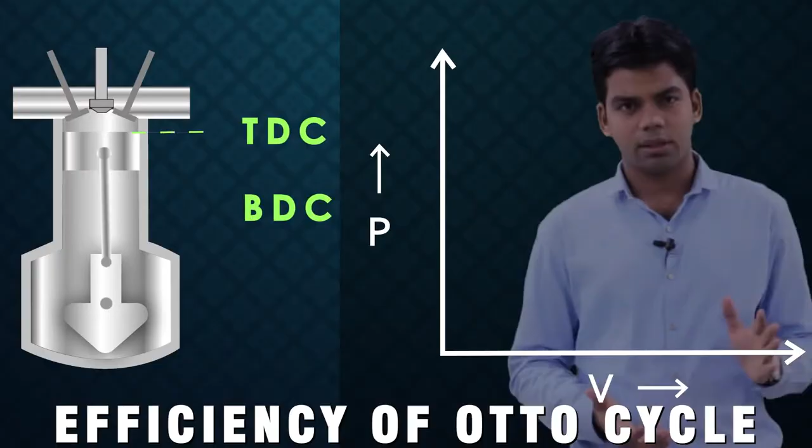Now we will draw the PV diagram for this Otto cycle according to the working of this SI engine. So, we are having the pressure in the y coordinate, volume in the x coordinate. Initially the piston is at TDC, as you can see here. Initially the piston is at TDC and the volume inside the cylinder is nothing but the clearance volume. Here I can show this point with 0. The volume here is the clearance volume.

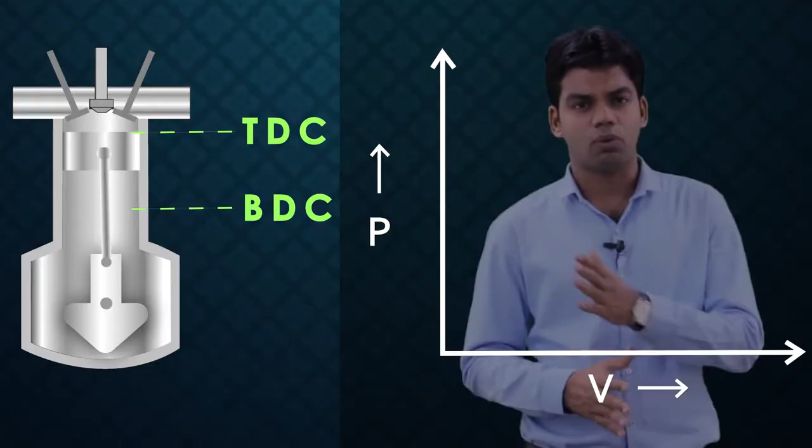Now, as the piston moves from TDC to BDC, you can see the volume inside the cylinder is increasing. The pressure is almost constant. Here, as I told you, we are discussing the ideal Otto cycle only. The pressure is almost constant, the piston is moving from TDC to BDC, volume is increasing. Okay, so, it will travel from 0 to 1. Now, after that, this was the suction stroke. Now, second stroke is the compression stroke.

The inlet valve is now closed and the piston will travel from BDC to TDC, and ideally this compression is assumed to be a reversible adiabatic compression process. Okay, so, we are having a reversible adiabatic compression now, and at the end of this compression the piston will travel from BDC to TDC. The process here is from 1 to 2.

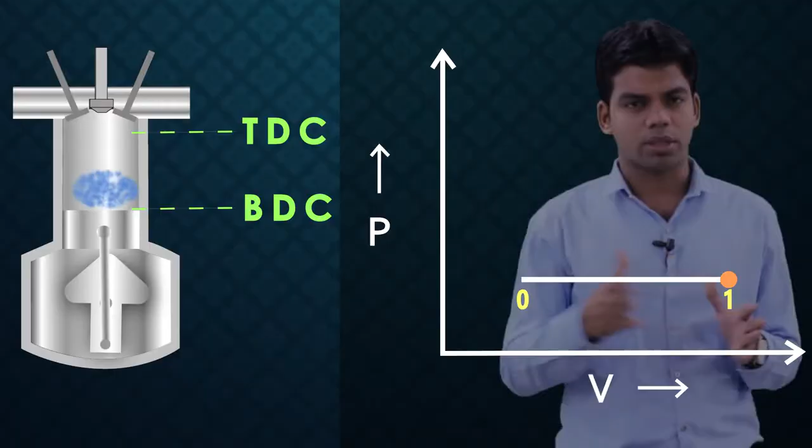Then after that the spark plug will produce a spark and the heat is added to that fuel air mixture, or that fuel air mixture will be combusted. And as I told you, that heat addition is at constant volume. We assume that heat addition in the ideal Otto cycle is at constant volume. So, we are having a constant volume heat addition process. Okay, so, from 2 to 3 is a constant volume heat addition process.

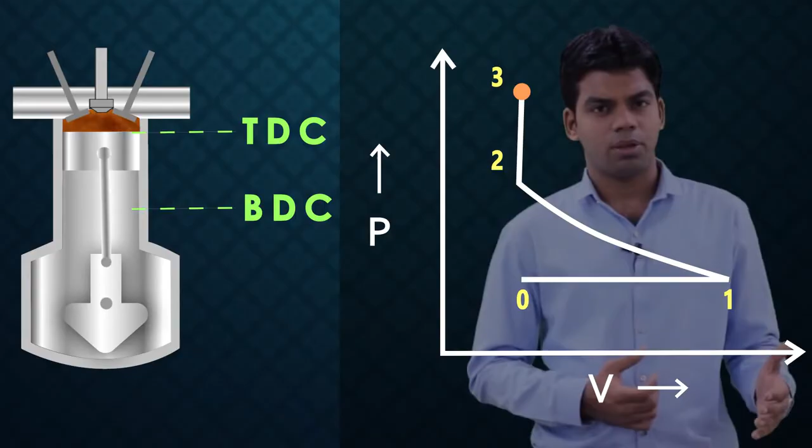Then after heat is added, it will expand, and that expansion ideally again is assumed to be a reversible adiabatic expansion process. So, 3 to 4 is a reversible adiabatic expansion process. Okay, and the piston in this expansion process will travel from TDC to BDC.

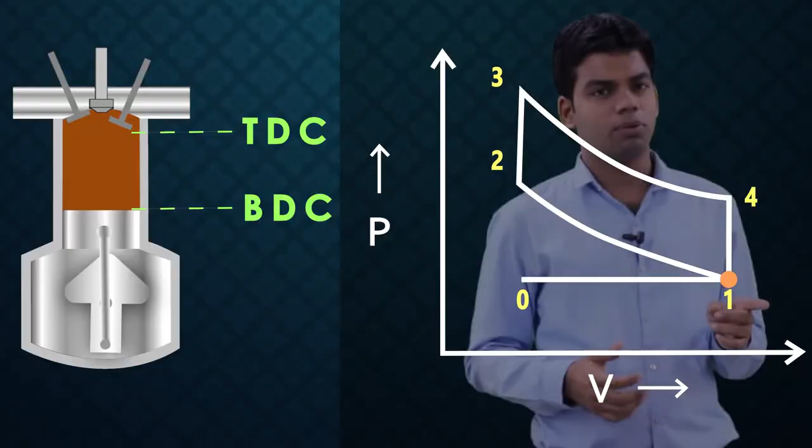Now, at the end of this expansion the heat will be rejected, and that heat rejected is again at constant volume. Okay, so, heat rejection at constant volume from 4 to 1, and after that the exhaust stroke, the piston will move from BDC to TDC, the flue gases will get exhausted. Okay, so, here the piston will again move from point 1 to point 0. Okay, so, this is the whole Otto cycle.

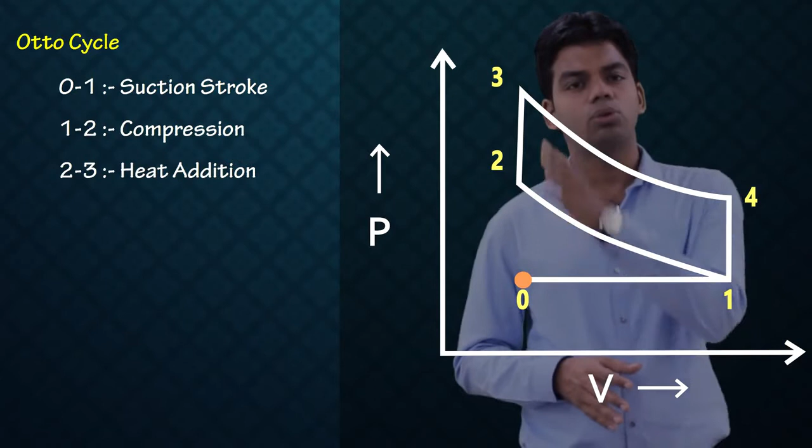0 to 1 is the suction stroke, 1 to 2 is the compression stroke, 2 to 3 is a constant volume heat addition, 3 to 4 is an expansion stroke, 4 to 1 is a constant volume heat rejection, and then from 1 to 0 is again the exhaust stroke. So, this is the whole Otto cycle.

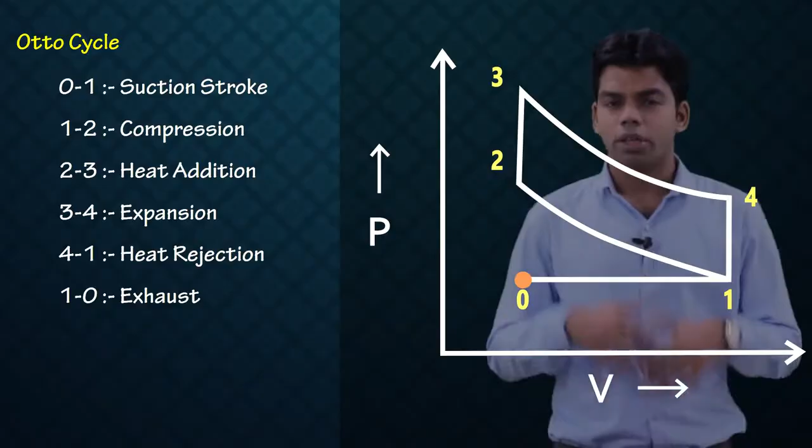Now, here you can note one thing, that ideally we are assuming the reversible process. All processes are perfectly reversible. So, during that reversible process, the path which is travelled during suction stroke and exhaust stroke will remain same. In actual cycle, obviously this path is not same, they are different paths due to irreversibilities, but in ideal cycle, because of reversible processes, the path which is travelled from 0 to 1 during suction stroke, same path will be travelled from 1 to 0 during exhaust stroke.

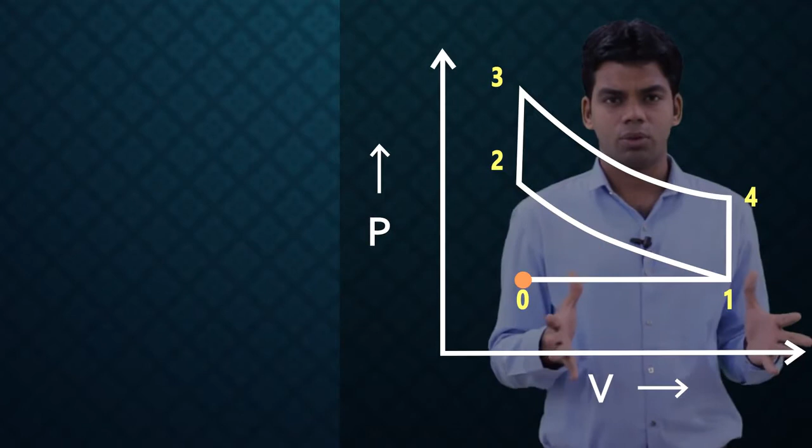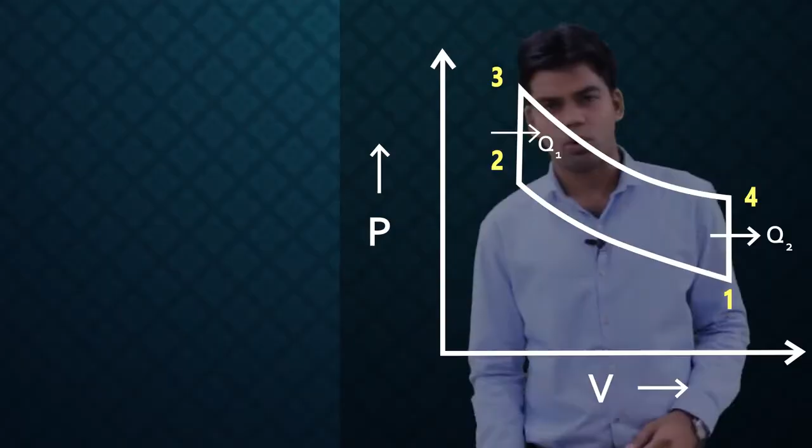That means the work which is done by the system, by the engine during 0 to 1, the same work has to be done on the system, on the engine from 1 to 0, and that work will be cancelled out. So, we can eliminate this 0 1 line, because we assumed it to be a reversible process, and from 0 to 1 and 1 to 0 positive work, negative work will get cancelled out, and finally, we will get the cycle as 1 2 3 4. This is our final Otto cycle. We will consider this cycle as the final ideal Otto cycle.

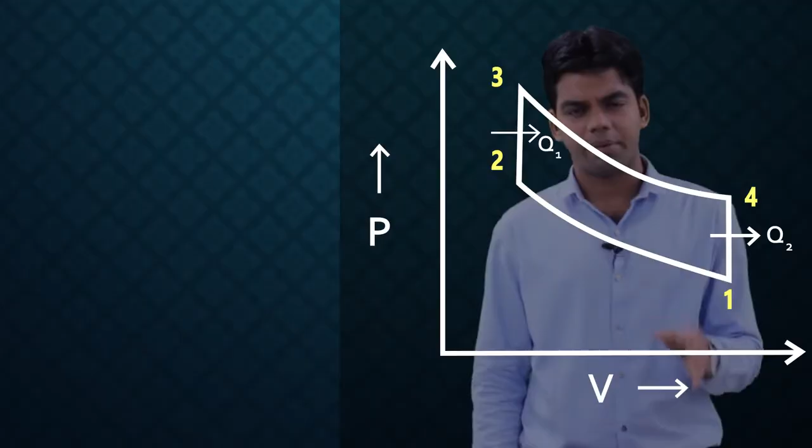1 2 is a reversible adiabatic compression, then constant volume heat addition, then reversible adiabatic expansion, and then the constant volume heat rejection. This is the whole Otto cycle. Now, similarly, we can draw the TS diagram for this. 1 to 2 is a reversible adiabatic compression process, which is an isentropic process. Reversible adiabatic process is an isentropic process. So, in TS diagram, we will be having a vertical line.

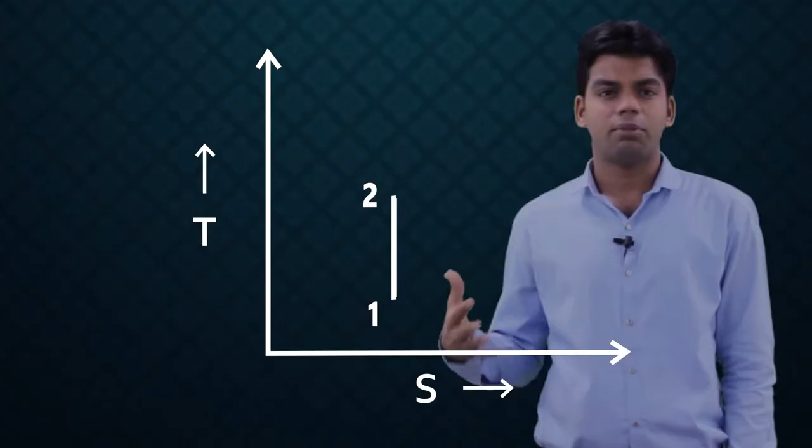Then 2 to 3 is a constant volume heat addition. So, we are having a constant volume process in 2 to 3. Then 3 to 4 again a reversible adiabatic, a vertical line, and then 4 to 1 is a constant volume heat rejection process, constant volume curve as we know in the TS diagram. Okay, so these are the PV and TS diagram for this Otto cycle.

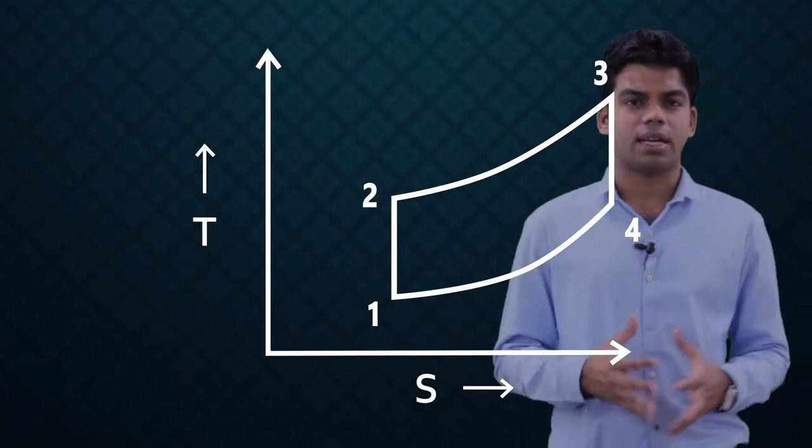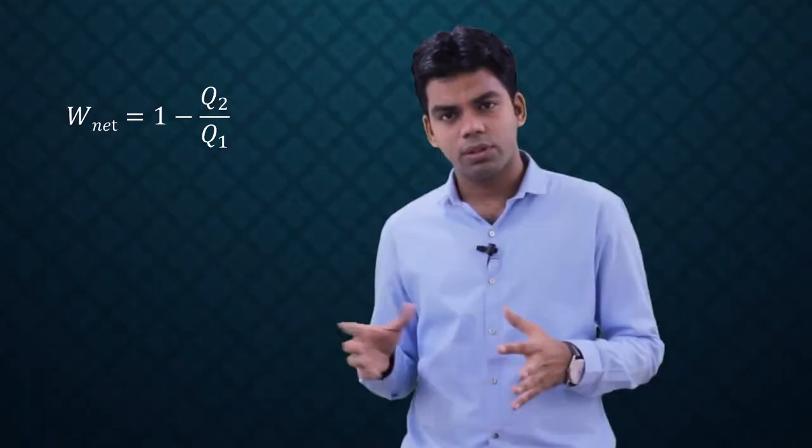Okay, so now coming to the efficiency of this Otto cycle. As we know, efficiency is W net by Q1, or Q1 minus Q2 by Q1, or you can call it 1 minus Q2 by Q1, where Q1 is heat added and Q2 is heat rejected. Now in this Otto cycle, heat addition takes place in the process 2-3, which is a constant volume process. So heat added at constant volume is mCv del T. So this Q1 will be equal to mCv into T3 minus T2.

Heat addition is in process 2-3. Now similarly, heat rejection Q2 is in process 4-1. So this Q2 will be equal to mCv T4 minus T1, since this is again a constant volume process. Okay. Now process 1-2, as we know, is the adiabatic compression process, and in this adiabatic compression process, T2 by T1 will be equal to V1 by V2 to the power gamma minus 1.

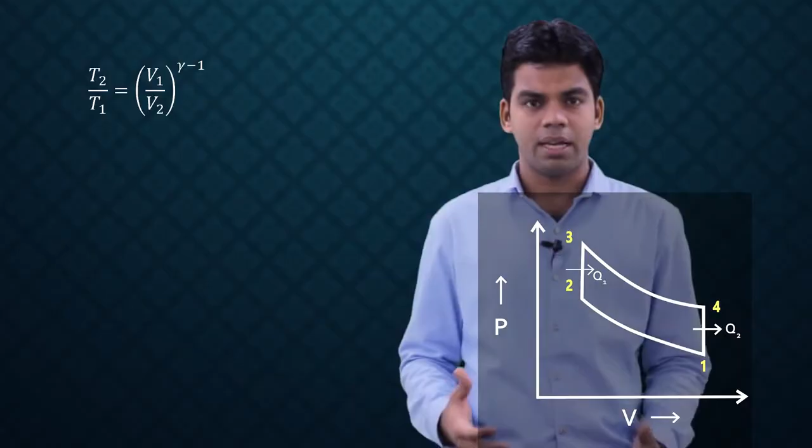And what is this V1 by V2? V1 is the maximum volume, and V2 is the minimum volume, or you can call it clearance volume. So the ratio of V1 by V2 is nothing but compression ratio. As I have told you, the ratio of maximum volume to the minimum volume of the cylinder is the compression ratio. So this V1 by V2 is nothing but Rk. So you can say T2 by T1 is equal to Rk to the power gamma minus 1.

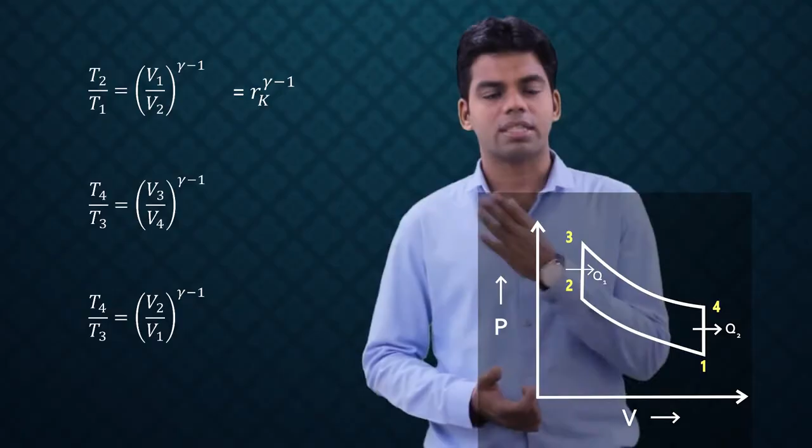Now similarly, process 3-4 is again a reversible adiabatic expansion process. So in this process, T4 by T3 will be equal to V3 by V4 to the power gamma minus 1. And V3 here is equal to V2, since process 2-3 is a constant volume process. V4 is equal to V1, since process 4-1 is a constant volume process. So this can be written as V2 by V1 to the power gamma minus 1, or Rk to the power gamma minus 1. Now from these two equations, T2 by T1 will be equal to T3 by T4, or you can say T4 by T1 will be equal to T3 by T2.

Okay. Now coming to the formula for efficiency, eta is equal to 1 minus Q2 by Q1. Q2 is mCv T4 minus T1, and Q1 is mCv T3 minus T2. mCv will be cancelled out, and we will get 1 minus T4 minus T1 divided by T3 minus T2. Now from the numerator, taking T1 as common, we will get 1 minus T1 into T4 by T1 minus 1. From the denominator, taking T2 as common, we will get T2 into T3 by T2 minus 1.

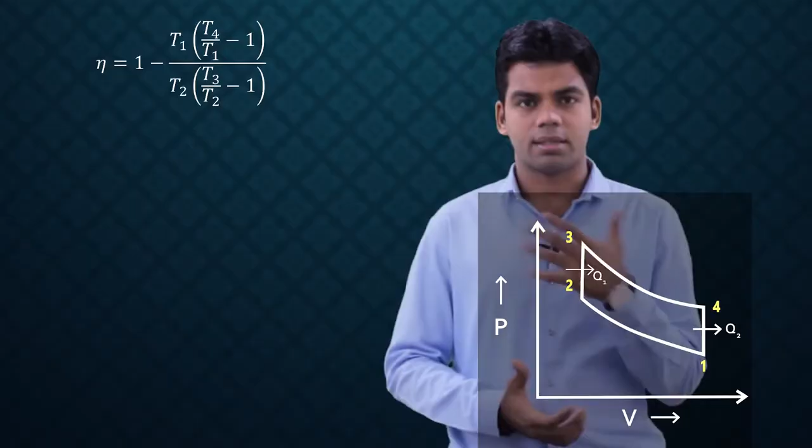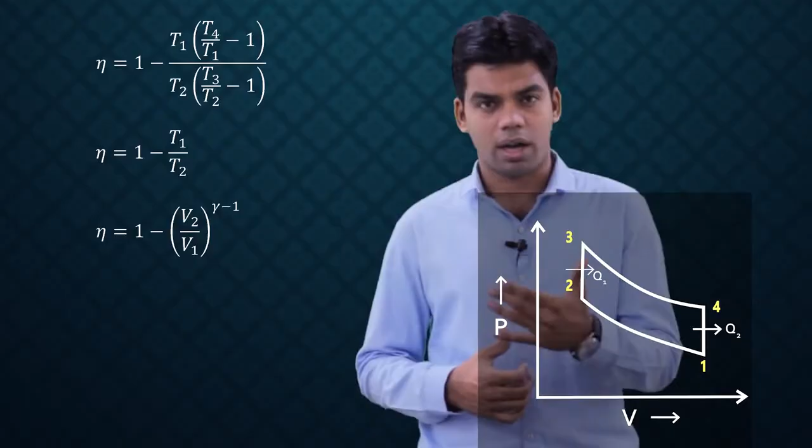Okay. And since this T4 by T1 is equal to T3 by T2, these will be cancelled out, and we will get efficiency as 1 minus T1 by T2. And as we know, T1 by T2 is equal to V2 by V1 to the power gamma minus 1. The compression ratio Rk is V1 by V2. So this will be equal to 1 minus 1 by Rk to the power gamma minus 1. So this is the efficiency of Otto cycle: eta is equal to 1 minus 1 upon Rk to the power gamma minus 1. Very important formula.

Okay. So from this efficiency, you can see that it depends on two factors. First is the compression ratio, and second is the gamma. Now what is the effect of this compression ratio? As the value of compression ratio Rk increases, 1 by Rk to the power gamma minus 1 will decrease, and 1 minus 1 by Rk to the power gamma minus 1 will increase. That means the efficiency will increase. So as the compression ratio increases, the efficiency will increase.

So this is one way to increase the efficiency, but is it the effective way? Because after increasing the compression ratio beyond a certain level, it will cause pre-ignition and knocking. Now what is this pre-ignition and knocking? If we are increasing the engine size beyond a certain level, pre-ignition will occur. Now what actually is this pre-ignition?

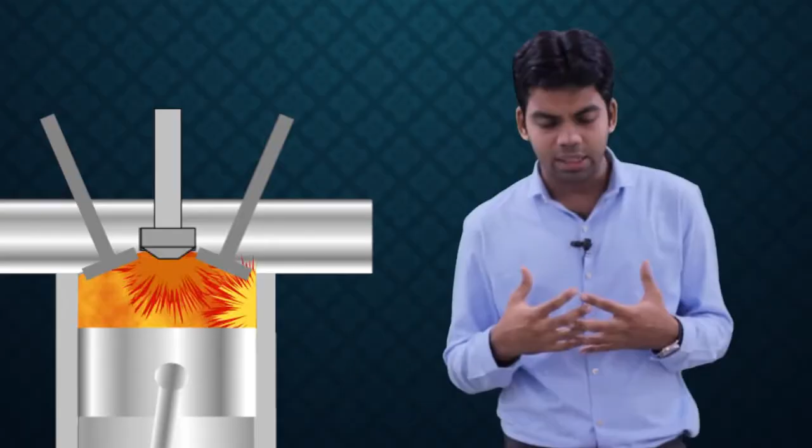So instead of using a single big engine, we always try to use multiple cylinders. In cars, where we use 1200 or 1500 cc engines, instead of a single cylinder we use 4-cylinder engines. In trucks and buses we use 6-cylinder engines. So wherever more engine volume is required, instead of a single cylinder we use multiple cylinders, just to avoid this pre-ignition and knocking phenomenon.

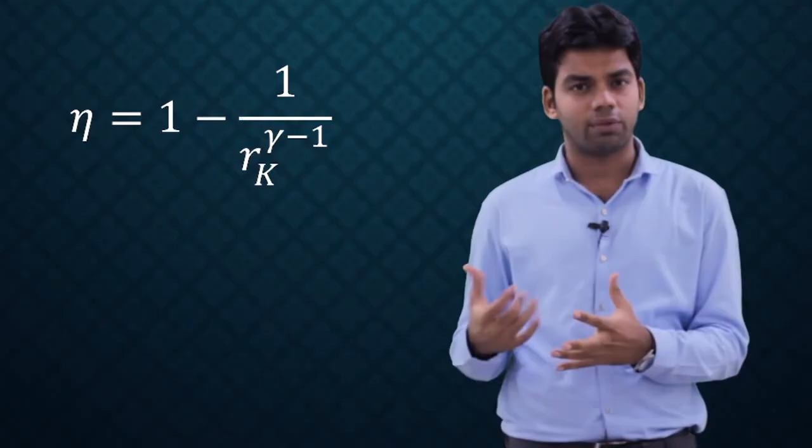As you can see in the efficiency formula, eta is equal to 1 minus 1 by rk to the power gamma minus 1. So increasing rk was the one way. Another way to increase the efficiency is to increase the value of gamma. More is the value of gamma, more will be efficiency.

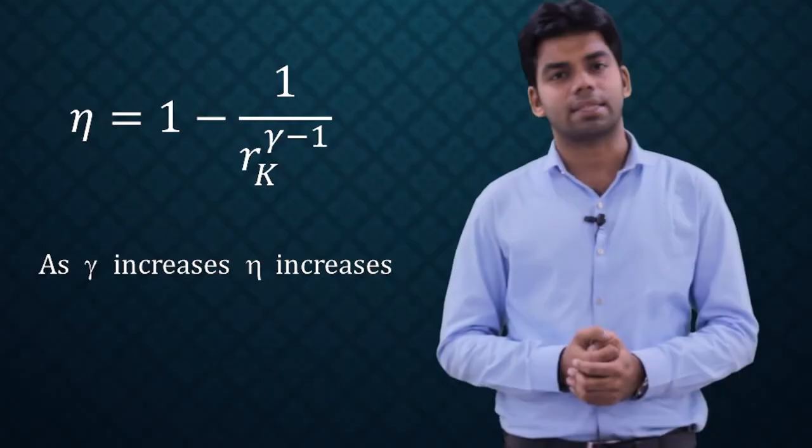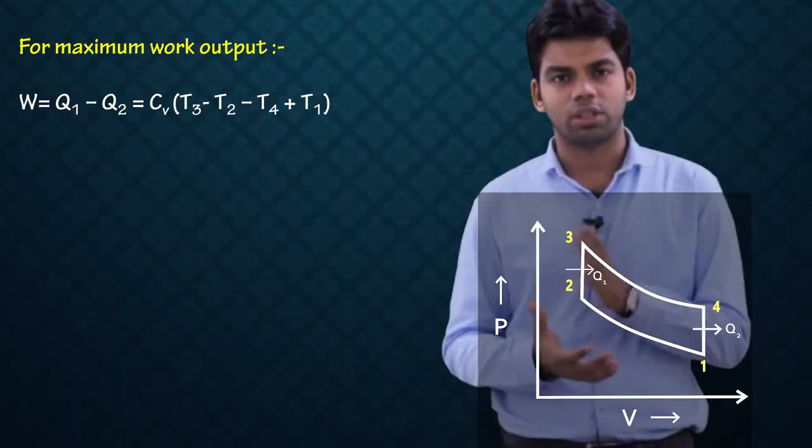Now let us determine the maximum work output for this Otto cycle. Work output, as we know, is equal to Q1 minus Q2. Q1 is Cv into T3 minus T2 and Q2 is Cv into T4 minus T1. Just put the value, we will get Cv into T3 minus T2 minus T4 plus T1. This will be our work done.

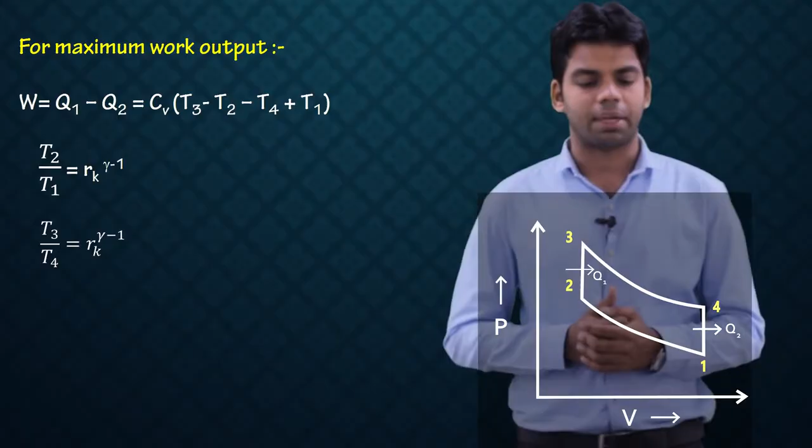Now, in process 1-2, this is an adiabatic compression process, so T2 by T1 is equal to rk to the power gamma minus 1. Similarly, in process 3-4, T3 by T4 is also equal to rk to the power gamma minus 1. From these two equations, T2 by T1 equals T3 by T4, or T4 equals T1 T3 by T2. So we have T4 in terms of T1, T2 and T3.

Now what is the use of this? I will tell you. The work done formula, as we have seen, W by Cv is equal to T3 minus T2, put the value of T4 here, minus T1 T3 by T2 plus T1. Now we have to maximize this work, and in this formula we have three different terms T1, T3 and T2.

The value of T1 is almost constant, which depends on the surrounding air, the suction temperature. The value of T3 is also almost constant, which depends on the metallurgical condition of the engine, because it cannot be increased beyond a certain limit, otherwise it will harm the engine. So the only parameter which can be changed is T2, and we can adjust T2 so as to get the maximum work.

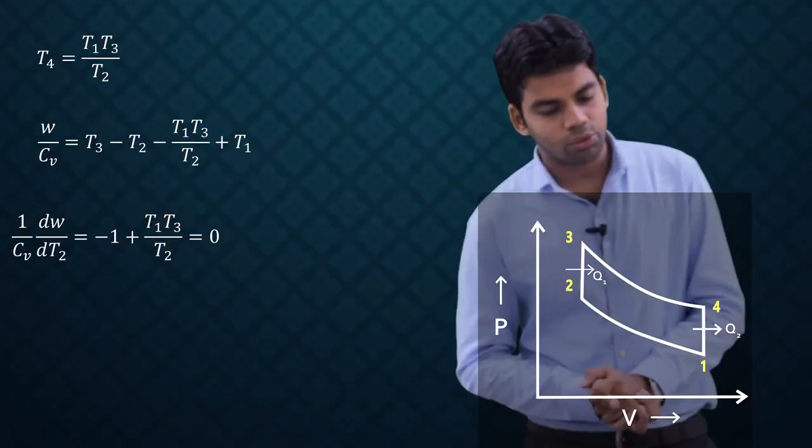To get the maximum, we differentiate this with respect to T2 and equate it to 0. 1 by Cv dW by dT2 is equal to minus 1 plus T1 T3 by T2 squared. This should be equal to 0. So T2 will be equal to under root of T1 T3, and similarly T4 will also be equal to under root of T1 T3.

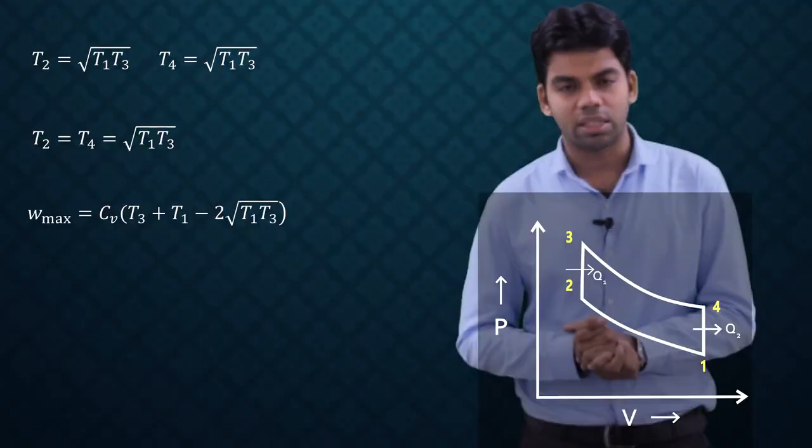Put these values of T2 and T4, the conditions for maximum work done, in the formula for work done, and you will get maximum work done. W max will be equal to Cv into T1 plus T3 minus 2 root of T1 T3. So this is the maximum work done which we can get in the Otto cycle, Cv into T1 plus T3 minus 2 root T1 T3.